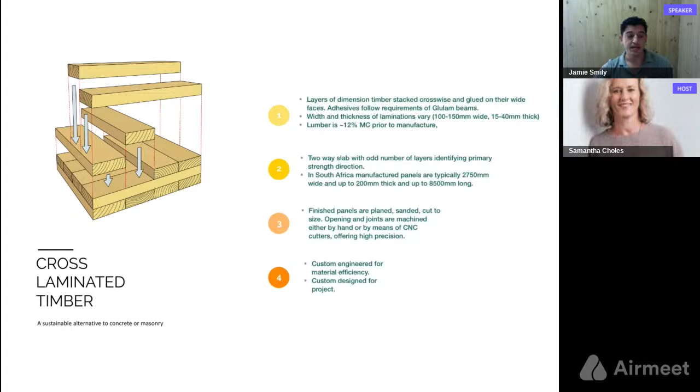We specifically deal with cross-laminated timber and to some extent glulam beams. But mass timber is a much larger range of products, and only a few of these are available in South Africa. Cross-lam is now available. Glulam has been available for a long time in South Africa. Very few of these other products are available, and to what extent they will come into the country, we're not 100% sure.

There is a good possibility for mass plywood panels, which very few companies are doing internationally, but it's a very exciting product.

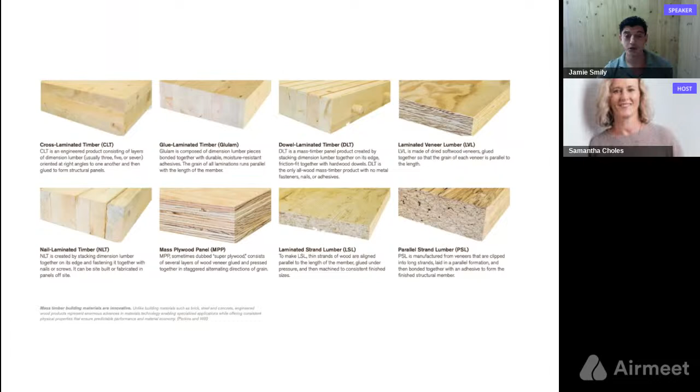Again, the standards that are in place, the fire test studies that have been done, and as part of all of this, there's structural testing that is required. So you know that the products that you're buying in South Africa are to a standard, which is quite a big thing, that we have a standard for a small country, a small producing country of mass timber. We already have a standard in place, and it does allow us the opportunity to grow the market in Africa and even allow for export.

So the key benefits that we know about mass timber: the speed, the carbon sequestration, reduction in labor costs, tight tolerances, improved safety, and the one that I would like to take a look at the moment is the off-site construction.

So one of the key benefits with mass timber is this speed of construction and the ability to pre-plan a project to much finer details upfront. This has quite a lot of benefits. One of the major benefits is that time, and how that time saving affects the costs of a project.

So timber, when you look at it from the outside, just as a comparison between brick and timber, timber always looks like it's a more expensive option. But if you take into account the entire development cost of these construction projects, and the time saving that these type of mass timber projects allow for - time saving in on-site building, reduction in labor on site, improved tolerances which allow for better quality control - this starts reducing your project program, and then these cost controls can be much tighter as compared to traditional build.

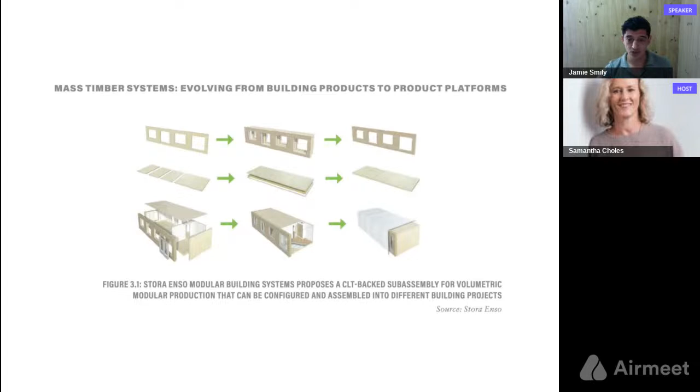But we have seen a few projects coming on board, and this seems to be the more interesting side with the off-site construction: these panels can now be developed into more complex items, such as full facades or even full building units. This is what this diagram shows you. We're seeing these type of things where they're manufacturing semi-complete or complete units in a factory now, being able to put that on a truck or trailer and take it to site.

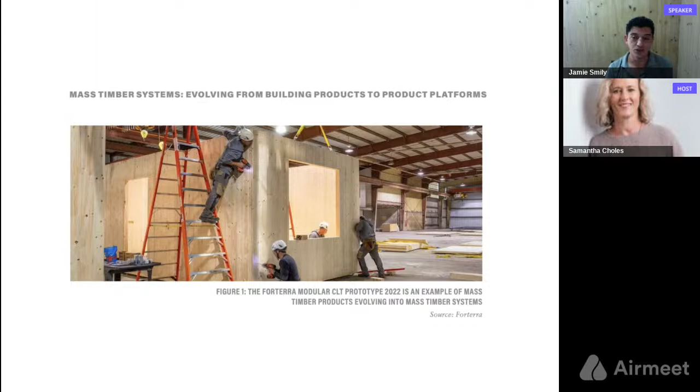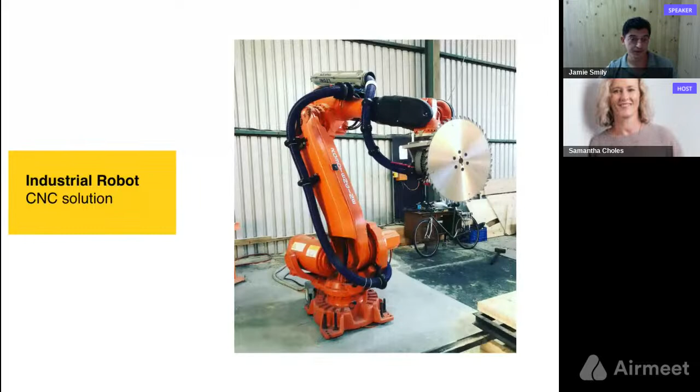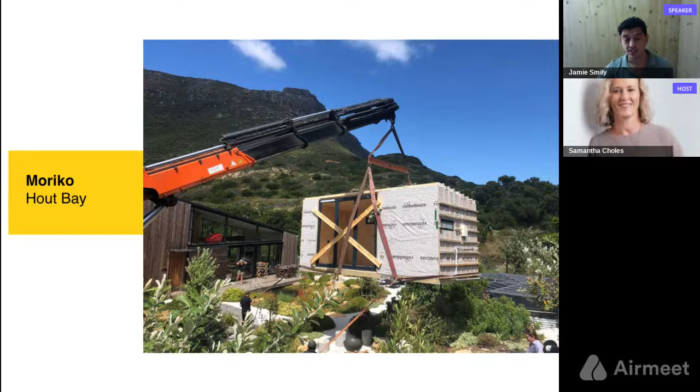The smaller version, this was done in Hout Bay by Moriko. This was built in a factory to a level where electrics and waterproofing and all of that stuff was done, then was lifted into place. The final cladding and fit out was done on site to leave you with a product like that. So this is quite a popular product that we're seeing, these type of small cabins for farms and for hotel type of accommodation.

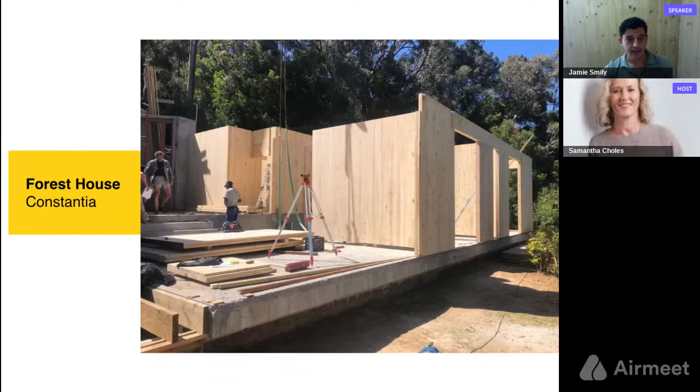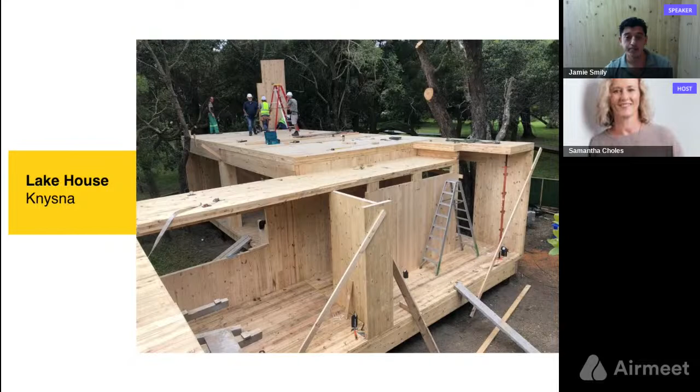And then this is the more typical type of projects that we're working on. These are panel type of projects where we're taking the 3D model, or the drawings from the architects and engineers, turning it into a 3D model, a panelized format, and then the panels go to site and are assembled on site. And then the finishing work is done on top of that.

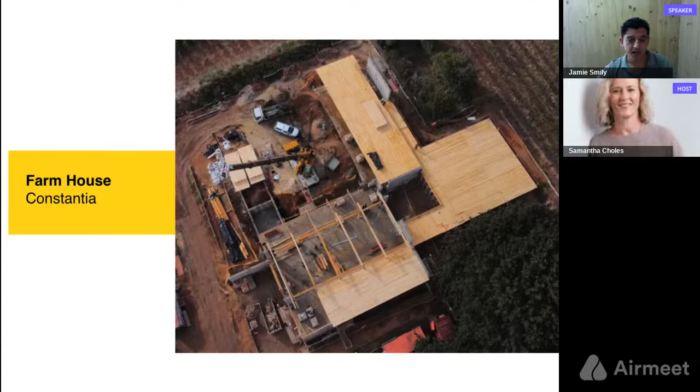So even with this type of construction, doing panels and then supplying it to site, you can make huge savings in your program and in your time, which obviously can lead to cost savings.

One of the issues you've got to take into account is our cost of labor in South Africa. In Europe, it makes sense for smaller type projects to be done in CLT because of the cost of labor for getting a bricklayer on site, whereas here it's a lot cheaper. So on a smaller scale, mass timber and CLT is cost competitive - we're not cheaper, we're not more expensive. But as soon as you start going on a larger scale, maybe 3 stories to 12 stories, then these benefits of speed of construction and cost savings come into play quite a lot.

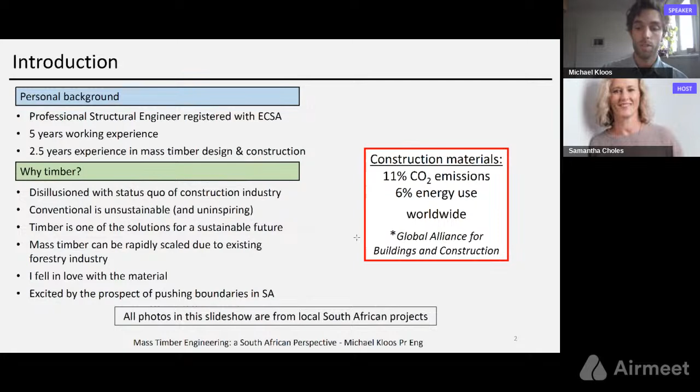So all the photos in the slideshow are from local South African projects that I've been involved in. Wood as a structural material is truly wonderful, but with great beauty comes great complexity. Timber is both an engineer's best dream and our worst nightmare. Why I say this is that timber has been optimally designed by nature to resist incredibly high loads and still remain light - you can imagine the wind forces, the compression forces on a tree are really significant. But it has a lot of structural challenges. Wood comes from the earth and the earth wants it back - this is basically through insect attack and fungal decay.

So we really have to be very careful when we design with wood. All materials return to the earth eventually. For instance, steel rusts, but the rate at which timber can decay is quite impressive.

And the other big challenge is the variability. There's a plethora of factors that influence the strength and stiffness of timber. So there's a few here: species, age, the location of a plank within the tree. You've got your knots, you've got moisture content. There's 8 different strength values for timber as opposed to 1 or 2 for concrete and steel.

So all of this makes it quite challenging for us as engineers because we like design values that are in a table, that we can work with safely. But timber, there's just a lot more variability.

So how do we address these challenges? For the natural attack, we have to treat the timber. Basically, in all coastal municipalities, this is required by law. We have various treatments available to help with this.

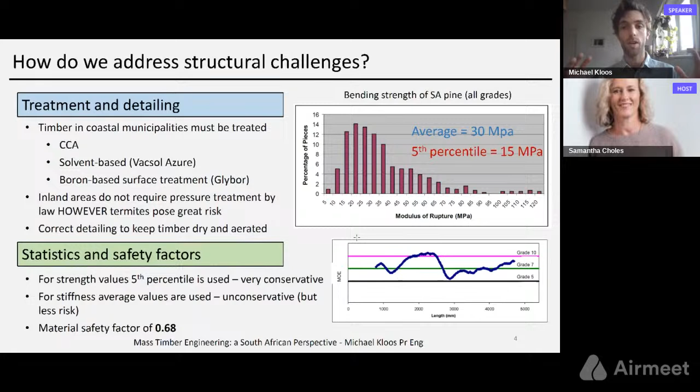For stiffness, we're less conservative. We use the mean values, but the thinking here is that if a beam deflects a little bit too much, it's not really a problem. We're not putting people's lives at risk. And then furthermore, we do apply a material safety factor of 0.68. So this is how we as engineers kind of take this highly variable material and make safe buildings.

So in terms of mass timber design, it introduces more complexity now. Glulam is more established and less challenging, but cross-laminated timber adds another whole dimension because the grain is running in different directions. And the fact is that we have zero guidance in the SANS codes for structural design of CLT. And even in international codes, such as the Euro code and the American codes, it's only now starting to come into the codes.

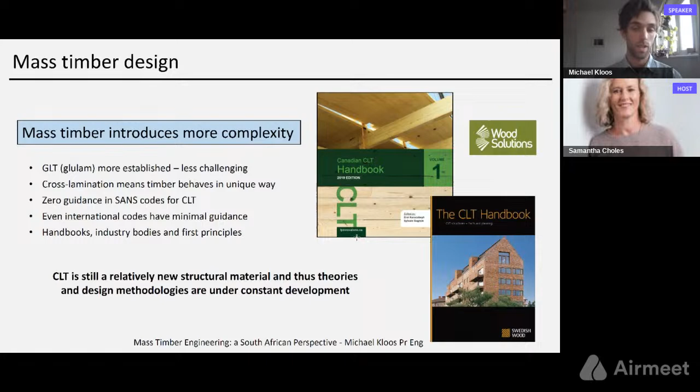So I rely on handbooks such as the ones on the right, industry bodies such as Wood Solutions, and first principles to do my designs. So it's a relatively new structural material still in the bigger scheme of things. The theories are still developing, the methodologies are still developing, which makes it challenging, but it also makes it quite exciting and does allow us a lot of design freedom, which I quite like.

So where are we in South Africa with mass timber? We're making residential buildings, small-scale modular buildings, and non-structural elements such as facades and walls. You can see some examples on the left. Where we really want to be going is more mid-rise commercial. This is where mass timber has the greatest potential, in my opinion. So we're not quite there yet, but we are heading there.

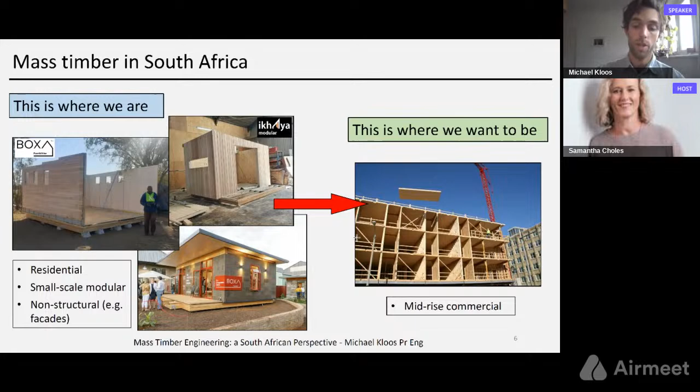So in terms of what my structural design workflow is, basically we start at a concept design stage where I'm working very closely with an architect and the rest of the team. And we come up with designs, which then I take through structural analyses, and that's an iterative loop, which runs for some time. Once we've gotten to a point where we can move forward, we go to the detailed design phase. And this is where 3D modeling is very, very important. You can see here are two examples of buildings which I modeled in Revit, where every single panel has got a name, the dimensions are exact.

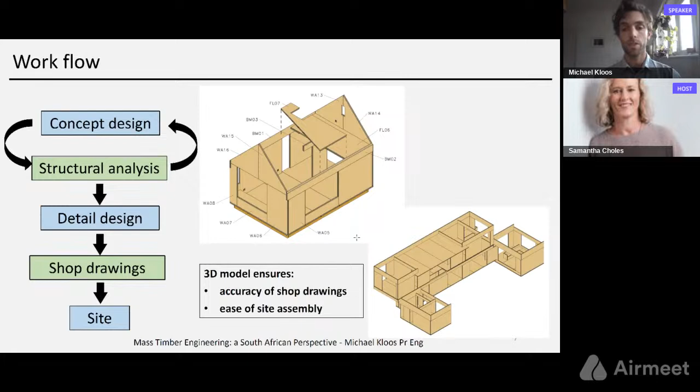And from this, I can generate accurate shop drawings myself, and also create assembly drawings for the assembler. And then finally, a very strong site presence from the engineer is very beneficial so that you can see what's working and what's not working.

So in terms of shop drawings, the shop drawing is basically the drawing that a manufacturer uses to create the panel. Often this is created by manufacturers themselves, but I often do them myself because it removes a kind of broken telephone effect and gives me a lot of control in ensuring that things are drawn correctly. Because if something is drawn incorrectly, it's not going to fit on site, and that throws out the whole benefit of hassle-free construction.

And then also on the right, you'll see connection details here. So this is basically showing the assembler exactly how to put the building together, which screw to use, where, what's the spacing, and structural details are very important to make a safe structure.

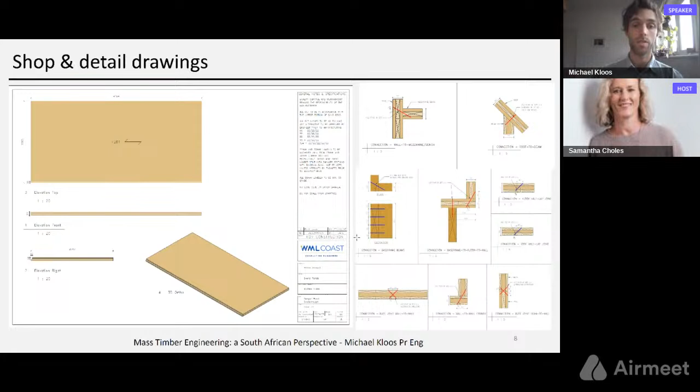So where I have found the complexity to lie within structural engineering of mass timber, especially, is in the detailing. So how things meet, where A meets B, how do we fit things together? There's an overwhelming number of different ways to detail timber buildings. There's hundreds of different types of screws, different plates. You can see some examples on the right there. So it can be quite overwhelming.

And it takes time to understand these different methods and then to figure out how you're going to fit everything together. And it's not only on the structural level, it's also integration with the rest of the structure. So how do we do the cladding? How do we fit everything together from an architectural point of view as well?

So all of this means that we're spending a lot more design time up front. And it does mean that we've got faster, hassle-free construction. But the flip side of that is that it places a lot more pressure on us as the design team to make sure what we're doing is right. So it's a challenging place to be because you can't really hide behind 'we'll figure it out on site.' Your drawings have to be 100% correct. Otherwise, it's simply not going to fit.

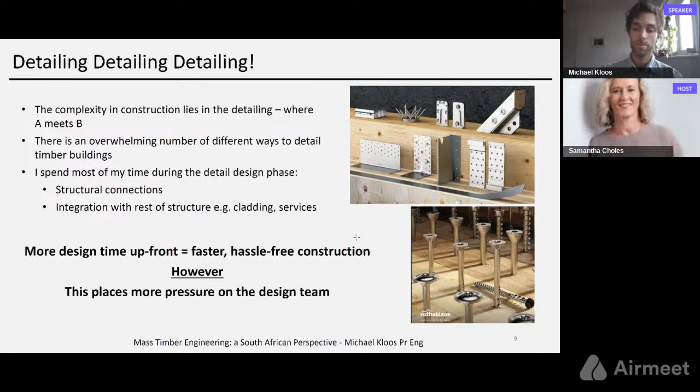So where I see the major challenges going forward is in the regulation on treatment of CLT. It's very unclear at the moment. It's not easy to pressure treat CLT, so we still need clarity there. There's a huge lack of skills and knowledge across the construction industry, including clients and building councils. We're generally very ill-equipped to deal with timber. In my university degrees, we hardly even spoke about the material.

And then arguably one of the largest challenges I see in the next few decades is a local supply of timber. Cross-laminated timber, or CLT, stands for cross-laminated timber, but it also stands for consumes lots of timber. So if we want to drive large-scale adoption of CLT, especially in commercial buildings, we're really going to need a lot of timber. So we're either going to have to start planting more trees, or for certain products we're going to have to transition from using trees for pulp and paper and other products and move them over into structural lumber.

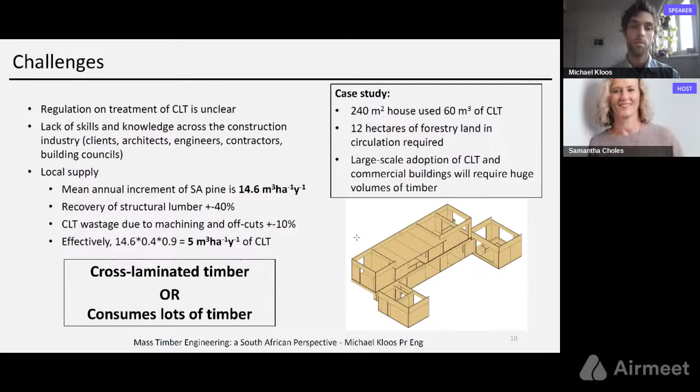So finally, just some advice I could give to structural engineers who want to get involved, or other professionals, is to equip yourself with knowledge. There's a lot of knowledge on the internet, but you're also welcome to contact me. I can put you in the right direction.

I found networking within the industry across the board, from manufacturers to designers, very helpful, including academia, so you know what's going on in terms of research. Like I said, it's changing all the time. You have to embrace a highly collaborative work mindset. Because you're working so closely with the architect, assembler and manufacturer, you can't go into meetings with a conflict mentality. You really have to be solutions-based and work together.

And then I would recommend you spend as much time on site as possible and in the factories to understand the material. And then finally, you've got to take a bit of a leap of faith, because we are at the beginnings of something and we all believe in it, but we're not quite at large-scale adoption yet. So you've got to take that little bit of a jump.

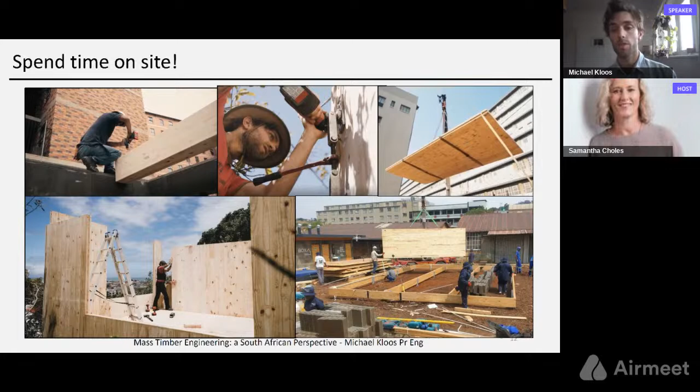And then finally, I think especially for engineers, I can't stress enough the importance of spending time on site. If you've put together one of these buildings yourself, if you've rigged a crane to lift the panel, if you've put in the screws, if you've installed plates, it just massively increases your understanding of how these things work. And I found it very helpful to become a better engineer by actually putting these buildings together myself as well. And if you're like me, you also enjoy it. It's fun. Cool. Thank you, everyone. And I look forward to any questions.

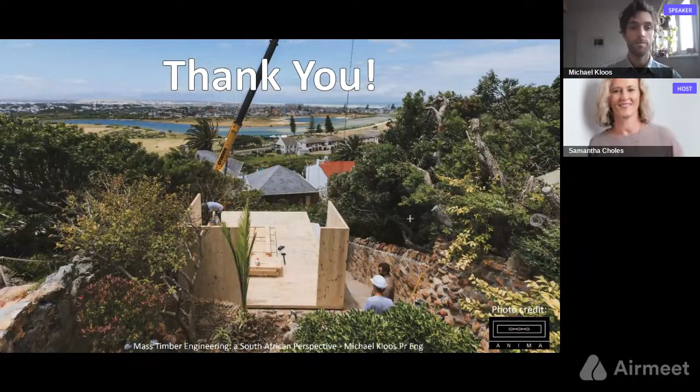Michela, are you ready? Hello, everybody. Yes, I am, but I can share because it's saying that all person can share the screen. Okay, thank you. Here we go. Yeah. Buongiorno, and it's over to you.

So, good afternoon, everybody. In my presentation, I will speak of maybe an uncomfortable issue, that is the durability of the timber buildings.

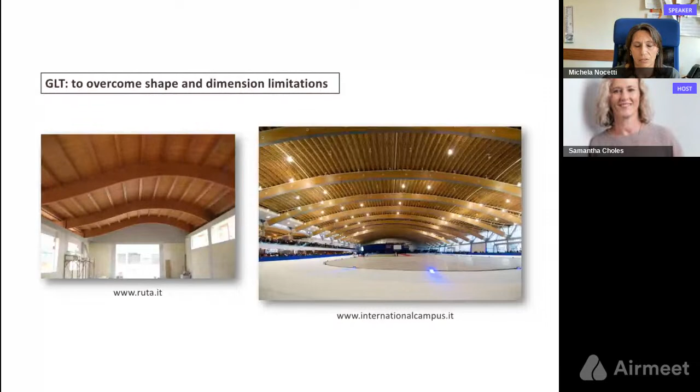We have said we all like wood, and of course we like to use wood in construction. Otherwise, we will not be here today, of course. And we are also right, because wood is really an extraordinary material, and in construction it is gaining more and more interest because of two main reasons. The first one is the rise of the sustainability matter, of course. The second reason is because of the technological developments, which bring wood engineered products. As an example that was already mentioned, we have the glulam that's very known, and it led to overcome the shape and dimension limitation of solid timber construction. And of course, we have CLT, which changed completely the way of building with wood.

But wood is always wood, and it has its own characteristics. Some are positive, of course, but some are less positive. Here you can see the pros and the cons of using wood in construction. Many of them have already been mentioned in the presentation before, I thank you for that. We know that timber is a renewable and recyclable material. It has a very low environmental impact. It's very efficient in terms of energy. It is light, and therefore it's easy to transport compared to other materials. It has a high degree of prefabrication, and therefore it's easy and quick to assemble and dismantle if needed. It is called dry construction and can be fully reversible. But we have seen wood is a biological material, therefore it's highly variable, and it is subjected to biotic and abiotic degradation. This means that we have to put a lot of attention during the design, but also during the assembling of the building and also the maintenance.

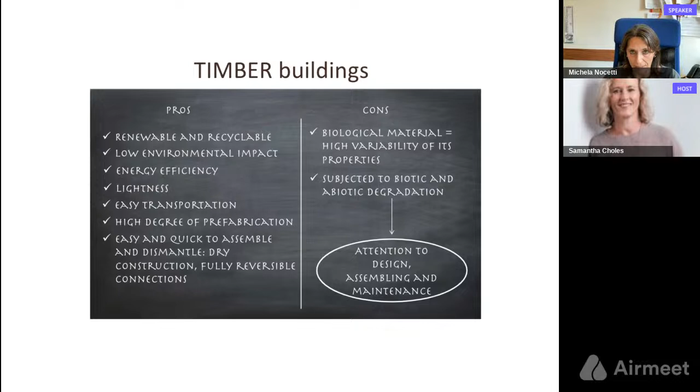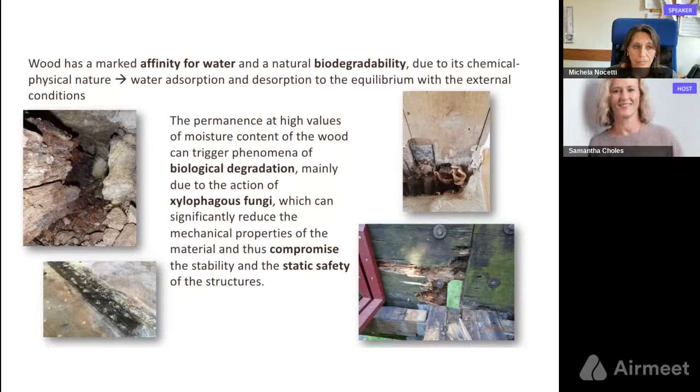Today I will focus mainly on the risk of water. Wood has a great affinity with water. This means that it absorbs and desorbs water to get in equilibrium with the external condition. But when the humidity is high or there is free water, it can reach high values of moisture content. And when this high moisture content lasts for a while, let's say above 20-25% moisture content of the timber, biological degradation due to fungi can start with a significant reduction of the mechanical properties of the material. And with time, the degradation can also compromise the stability and the static safety of the structure. So, when designing with wood, we like to say that we have to move forward from the durability of the material, the concept of durability of the material, to the durability of the entire structure as a whole.

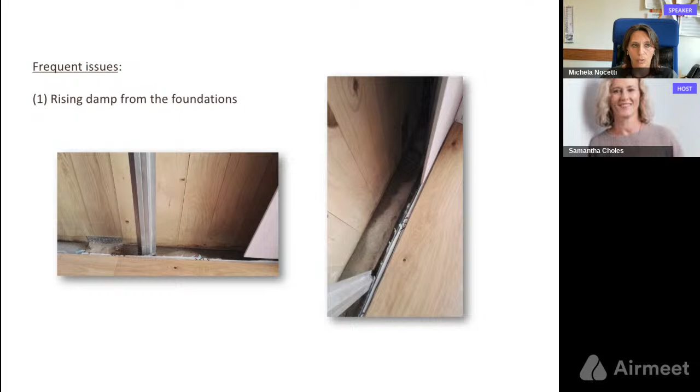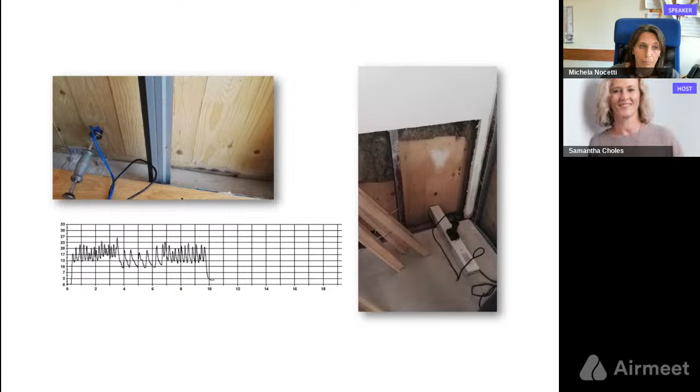Today I will present some issues that may occur in CLT structures. I hope to not scare you too much, but it's useful to know, to be aware, to tackle them. So a frequent issue is the rising damp from the foundation. You can see here the water coming up. Here, I don't know if you can see my arrow, anyhow, here you can see the water that's coming out, and so we did perform some verification on the panels. These are CLT panels. You see the moisture content measurement on the left and the drilling resistance verification on the right. You see from the profile that it was a 3 layer panel and that it was still sound after the rising of the water. But in this case, it was not. And I can assure you that this was not the result of a fire.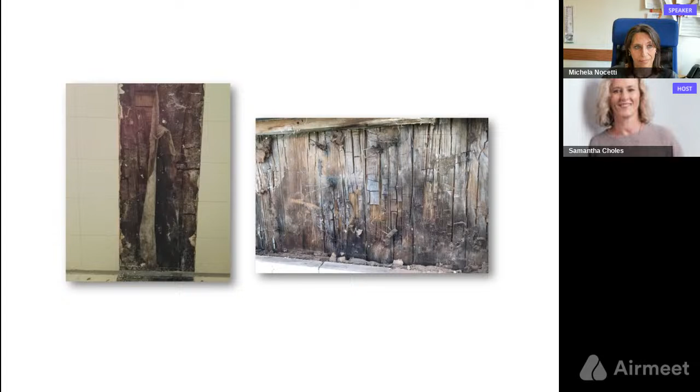A solution could be to raise the panels so they're not in contact with the foundation, and also let the air circulate. These are systems that are mostly patented, and there are some in the market, but they are very effective.

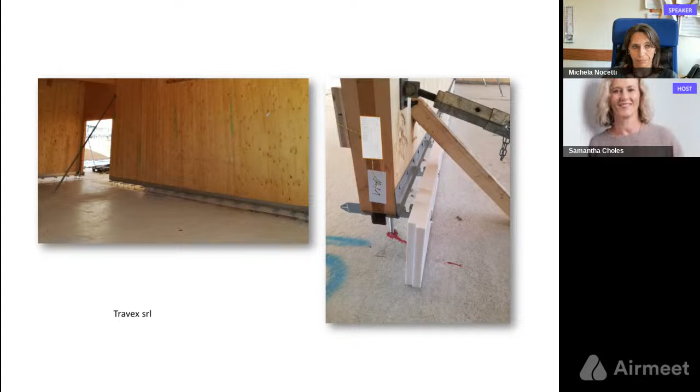Another issue can be the possibility of atmospheric precipitation during the construction site. Of course, wood can get wet, but then it should be able to dry again. After the fall of several millimeters of rain, this structure was completely wet, so the moisture content of the wood was checked before going on with the laying of the insulation and the enclosure. It is important that before cladding the panels, the wood is dry enough. This is very important.

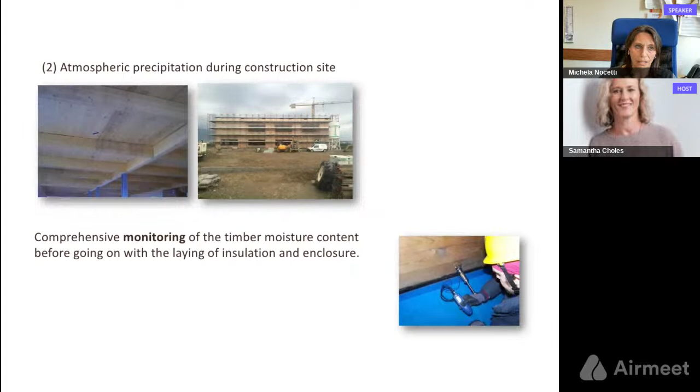After that, the structure was covered to prevent the rain going in, and at the same time, the ventilation was guaranteed.

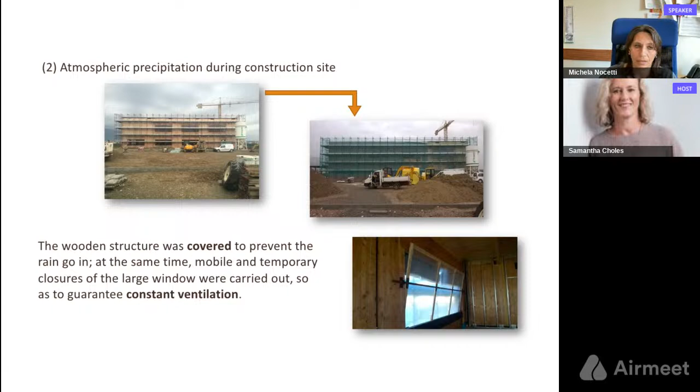It was also decided to set up a permanent monitoring system of the moisture content of the panels. Several measurement points were placed, spread throughout the structure, mostly at points critical for possible condensation or water infiltration. The measurements were collected by data loggers, and software was set to send an alarm when high moisture content values were detected. This could be a very useful system, especially when the CLT is completely covered and no longer visible or inspectable.

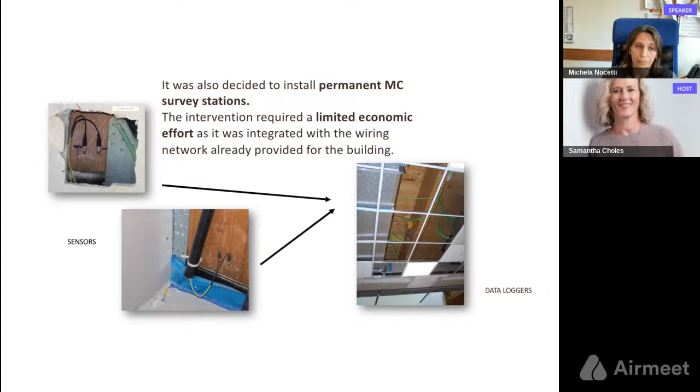Another issue could be an accidental spill of water in a building during its life. It's always possible. Think of water that comes out, even for days, from a broken pipe, for example.

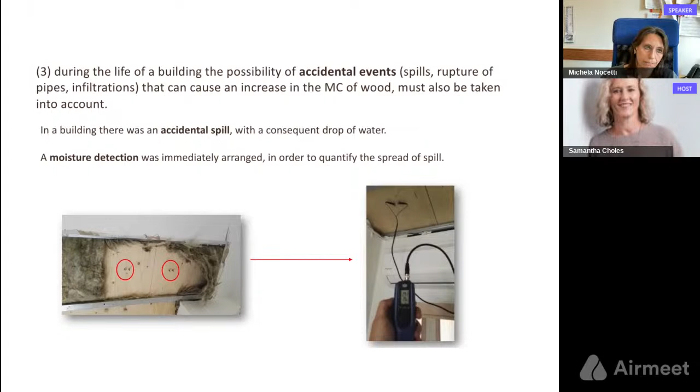The monitoring of the moisture content here started to quantify the spread of the water, but you see here, during the first weeks, the survey observed a general increase of the moisture content of the panels. Why was that? It was because the sound-absorbing carpet was soaked with water and worked like a sponge to gradually release it. So only when we completely removed the floor composition, and the panels were again exposed to air, did they have the possibility to dry again.

Therefore, the teaching could be that a lighter and easily removable floor composition could be advisable, for example.

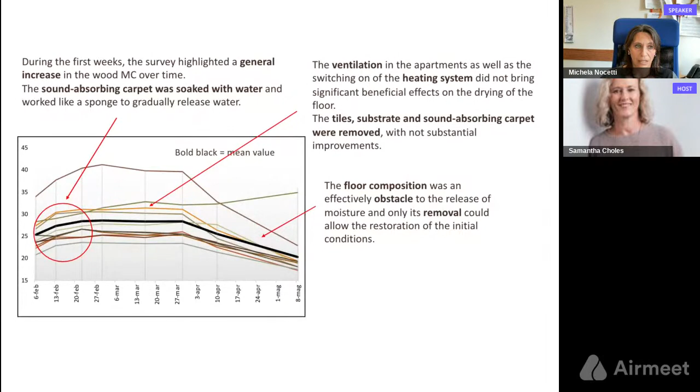And then very quickly, a few other issues. Flat roofs should be avoided. A slope, even small, even really small, is always better. Pitched or projecting roofs could be better. Of course, the insertion of rainwater down pipes inside the structure is also something questionable. We have seen this because outside they were not nice. All these elements may potentially let humidity accumulate and make it more difficult to detect this phenomenon quickly.

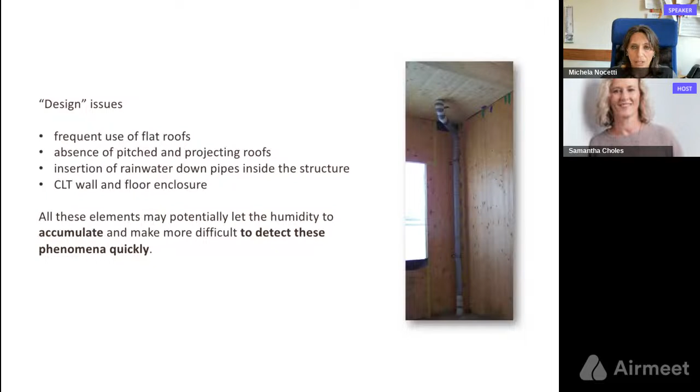So my conclusion is water can be really a dangerous enemy for timber construction. We shouldn't be scared, but we should keep it in mind. Think of fire. We know that it is a risk, and we design accordingly. So in the same way, the design of the durability of wooden buildings should become part of the current practice, like all the other phases of design. And it is also advisable for the monitoring of wooden buildings to become a consolidated practice in order to guarantee their structural efficiency and to guide maintenance interventions, both extraordinary if needed, or planned.

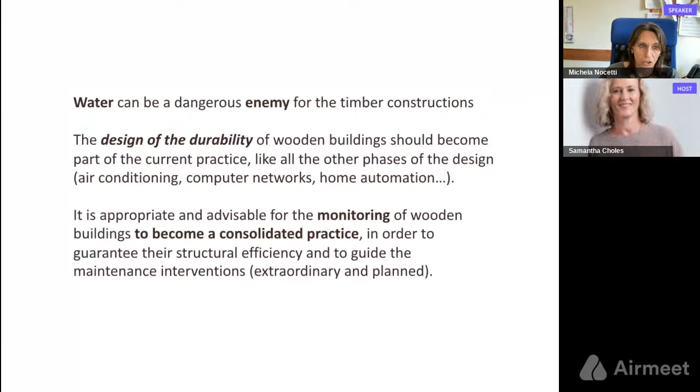So with this, I really thank you. And I'm here to answer your questions if there are any. Thank you.